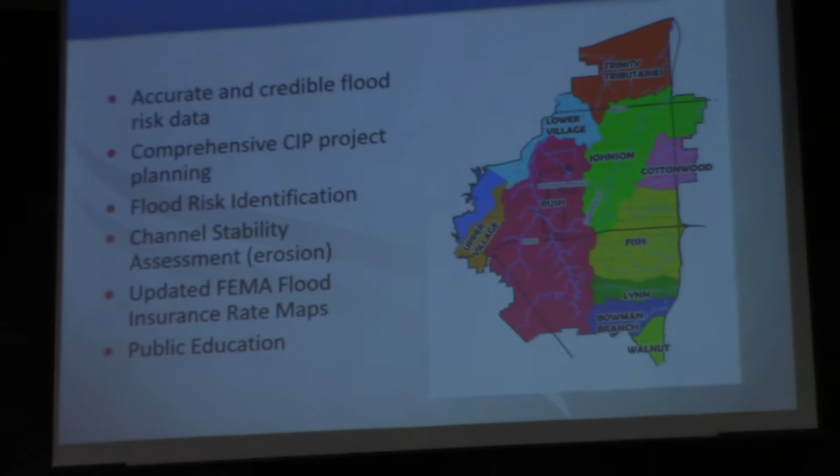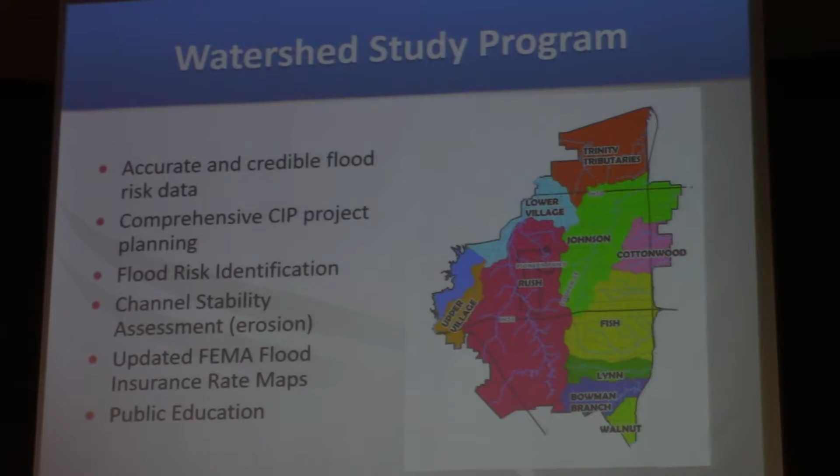So since 2010, when Tropical Storm Hermine hit the Rush Creek watershed and flooded out quite a lot, we've undergone the watershed study program. The whole goal was to update our floodplain information and identify ways to mitigate flooding and erosion issues. That was really driven by the fact that when Hermine hit, we realized that we didn't know where all of our flood risks were.

And so that's the purpose of the watershed study program, to take a comprehensive look at each watershed throughout the city and identify the flood risk, update it based on what's in the ground today, identify where the erosion issues are occurring, and then update the FEMA floodplain maps.

We're also using this information as a way to educate the public. When we find out an area is at higher risk of flooding, or it has specific stormwater issues related to it, we will do outreach to let them know, hey, buy flood insurance, protect your property, understand what your risks are so that you're appropriately covered when something happens.

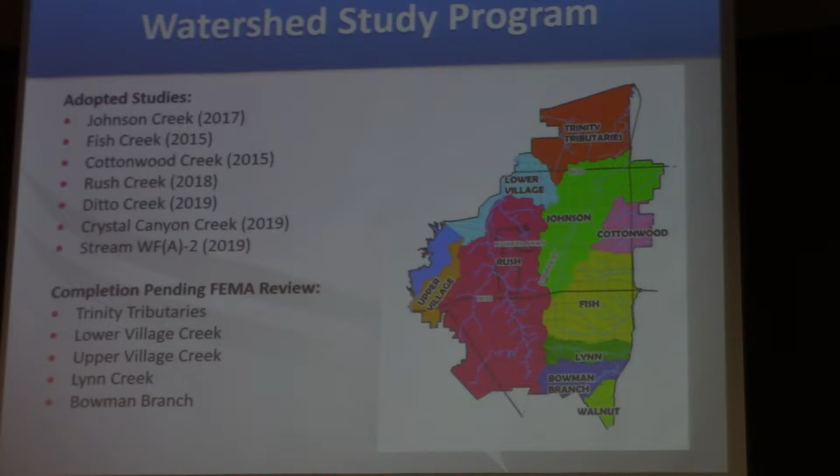So our progress to date is we're getting close to being done with the study portion of the watershed study program. This slide is really just to show you which watersheds we've adopted through council. And I will provide this presentation to him if y'all don't want to take pictures of all the slides, so y'all can actually see this and reference it. So y'all can see that we've adopted quite a lot of the city, and that's the capital plan, as well as where the flood risks are.

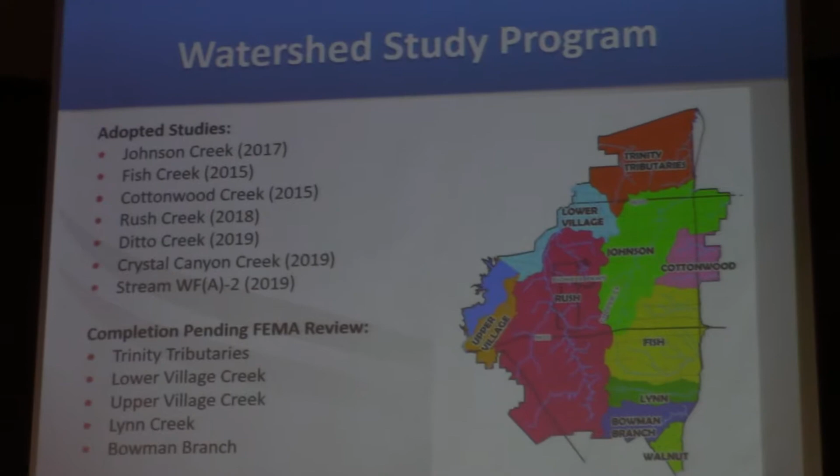And right now, we're finishing up the Trinity Tribs in North Arlington, the Lower Village Creek, Upper Village Creek, which hugs Lake Arlington, and Lynn and Bowman Branch. Those are pending FEMA review right now. We have all the information related to them as the capital program, as well as where the flood and erosion issues are. We're just going through the FEMA process now.

Even though we have FEMA involved in the entire process, we like to see what they say once we get to that final step and make sure it's where they like to see it from a mapping standpoint. And then once we have a good sense that FEMA is okay with it, we'll send it to council to actually adopt the watershed study plan that is being generated. And so this is kind of a general picture of where everything is now.

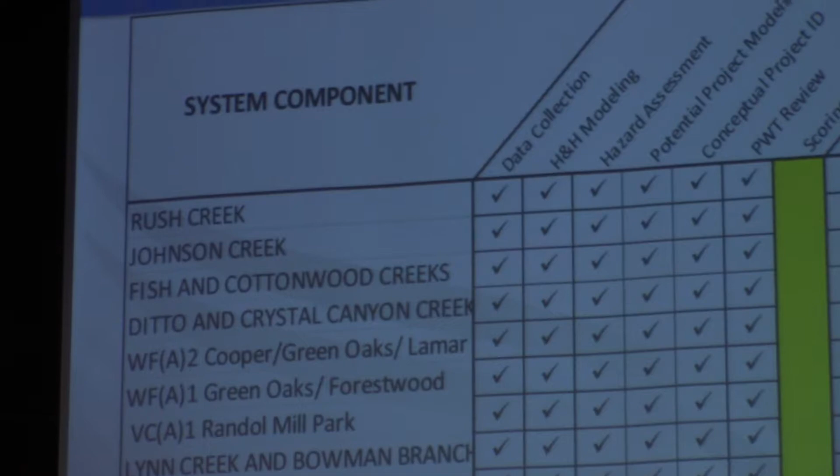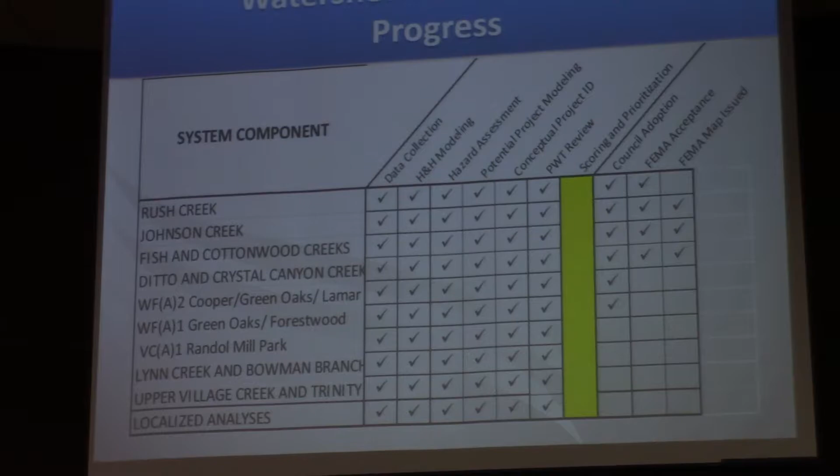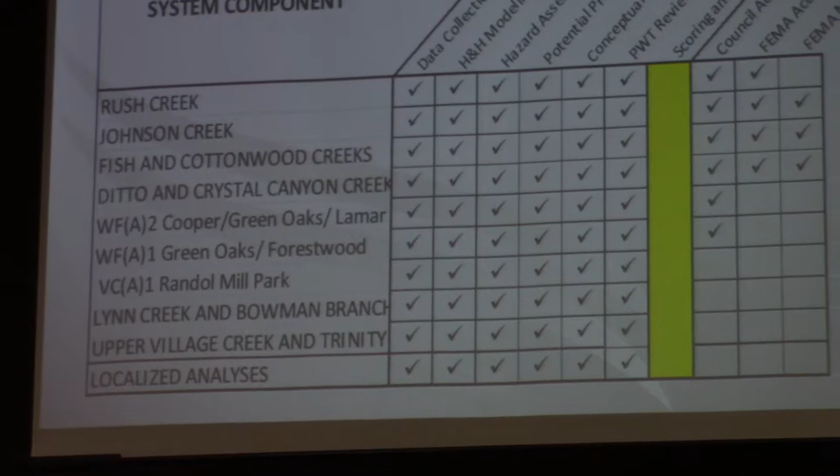We're at the stage right now where we're combining all of the plans into one comprehensive plan, along with a localized drainage analysis initiative that we started back in 2018 after the fall floods. That's basically the areas that are away from the creek. They don't have any identifiable open stormwater infrastructure, but they have storm drains that are potentially undersized. So we've been analyzing 60 areas, and right now we're going through the process of developing a comprehensive plan.

What a comprehensive plan is for the stormwater management program is it takes all of the requirements from a FEMA level, from a U.S. Army Corps of Engineers level, from the TCEQ level, and then starts taking a look at our capital improvement projects that we've been identifying through these initiatives, where our maintenance needs are, what kind of stormwater compliance initiatives we need, so water quality, stormwater quality, and then public education initiatives through the floodplain program: is there a better way that we can outreach to residents? We're going to take all of this information and put it together in one document.

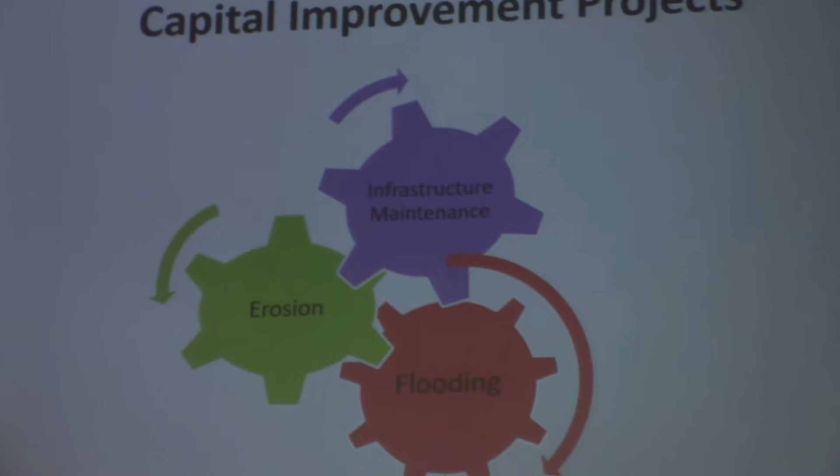And just to give you a guideline, for the capital improvement projects, the capital plan for the stormwater program, we're going to be looking at 3 primary areas, which are infrastructure maintenance, erosion, and flooding. And all of these will be brought together to do data-driven prioritization.

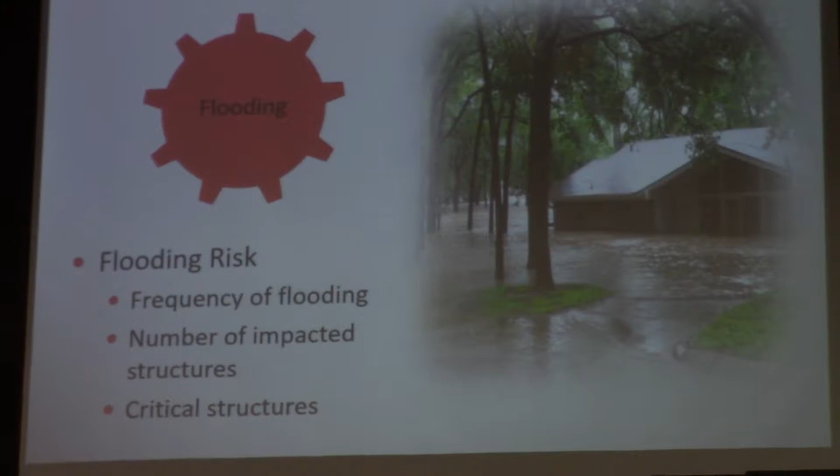So when we look at flooding, we're going to be looking at mainly flood risk. How frequently do people flood? What are the number of structures that are impacted? The critical infrastructure such as schools, hospitals, electrical, things that if they are disrupted, there's a pretty significant potential for either loss of life or a public health issue. It's hard to evacuate a school. So if there is a school at risk, we want to put a priority on fixing the flooding issues around there. Same thing with nursing homes and hospitals.

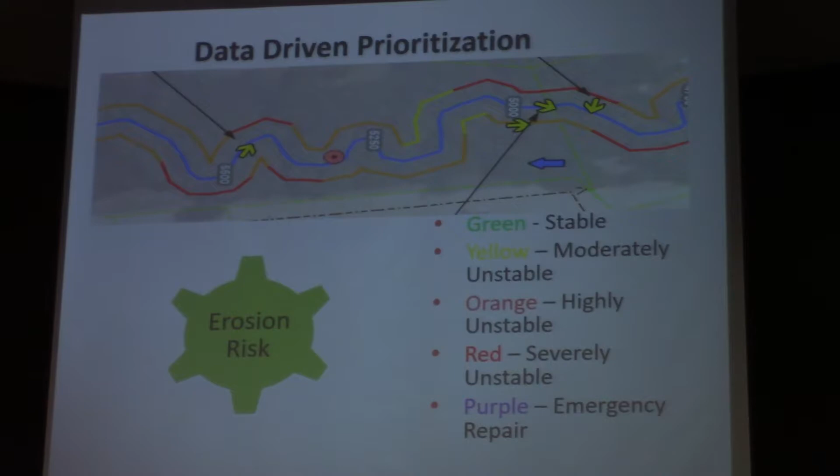From an erosion risk standpoint, we actually went through and walked each stream and identified where banks are severely unstable, or if they are stable, or if they are purple as in they need emergency repair. So we'll be going through and taking a look and seeing, okay, if a bank is at severe risk of failure and there's an opportunity to mitigate flooding, then we're going to look at projects that combine those

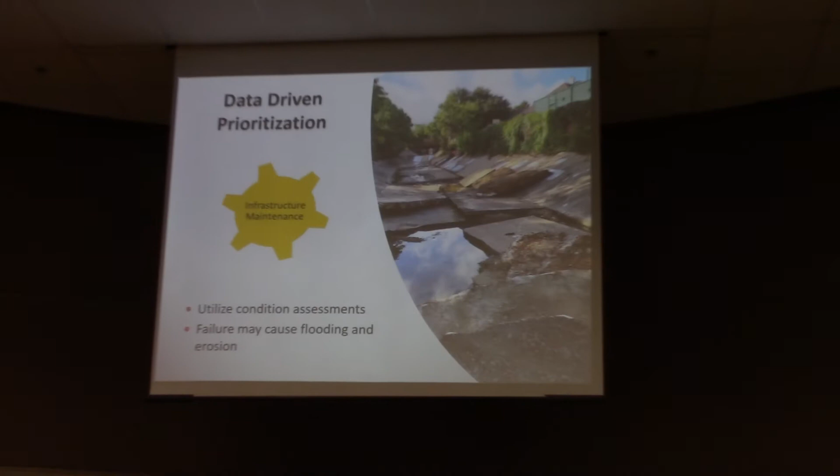flooding and erosion initiatives. And then from an infrastructure maintenance standpoint, you can see here that we've got a concrete lined channel that's just collapsed. It's no longer in working condition. And so we'll be taking a look at basically all of our storm drains, flumes, inlets, concrete lined channels, what their condition is. Like he talked about the red streets, we'll be doing the same thing with our stormwater infrastructure.

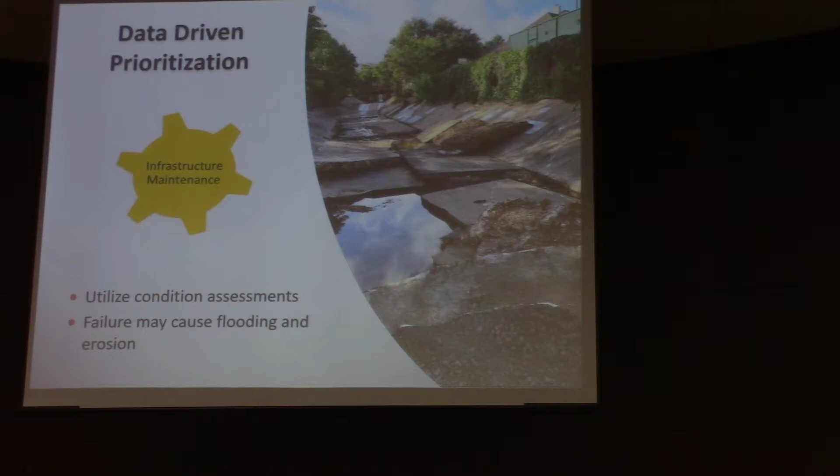So we have a sense of bringing in flooding, erosion, and infrastructure maintenance. We'll do the worst first is the best way to look at that. We'll also be considering regulatory risk of non-compliance. So if this is something where we're going to be non-compliant with FEMA or the Corps, we're going to focus on those, as well as if there's cost efficiency. So if Keith's group is doing a streets project and there's an opportunity to mitigate flooding in the area, we'll partner with them and make sure that the city gets the best bang for their buck when we actually

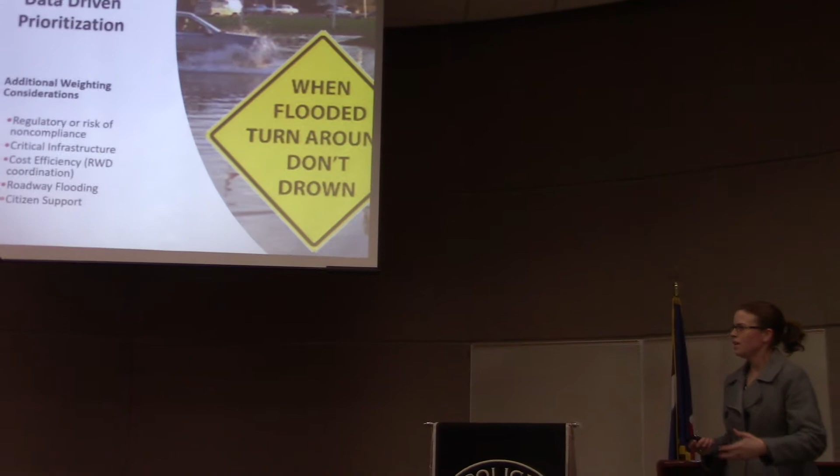do a project. We'll also be putting an emphasis on roadway flooding. So if we have an area that's highly traveled, we want to make sure that when people are driving on those roads and it's flooding, if they make the decision to drive into water, which they shouldn't, there's a lower risk of them being swept off the road.

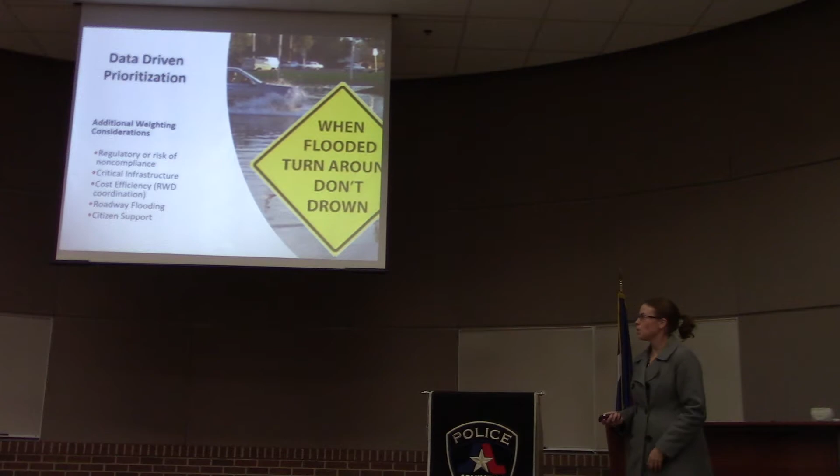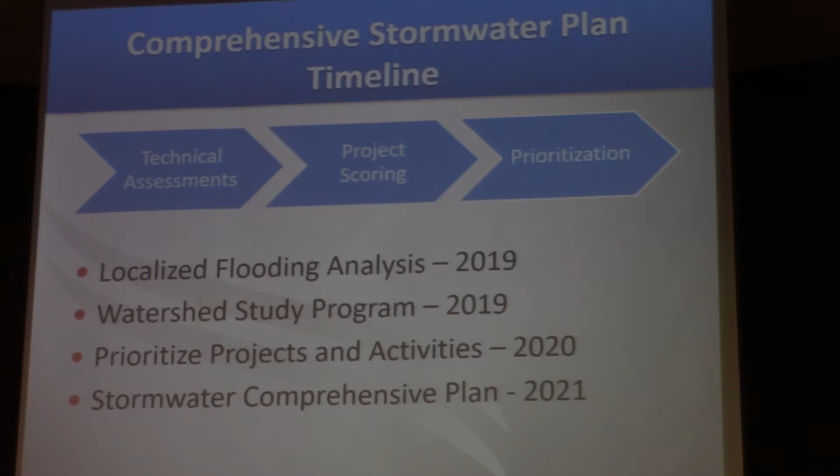So from a timeline standpoint, for the localized flooding analysis, which is those 60 areas away from the floodplain, we have done all the analysis portion of that. We finished the analysis portion of the watershed study. And this year we're focusing on prioritizing all of these projects and activities so we can actually start having a game plan and then identifying funding potential. So if we have grant opportunities or other ways that we need to fund it, we'll be identifying it through the plan. And then the goal is to have the plan for council adoption in 2021.

In terms of projects in West Arlington, we have the Country Club Drainage Improvements and Bridge Maintenance Project that is currently underway. You may have passed it along Park Road, but we are repairing a concrete bridge girder and also doing channel improvements to protect some sanitary sewer lines and mitigate flooding within the neighborhood. That construction started back in September, and right now we're scheduled to finish around May 2020, weather permitting.

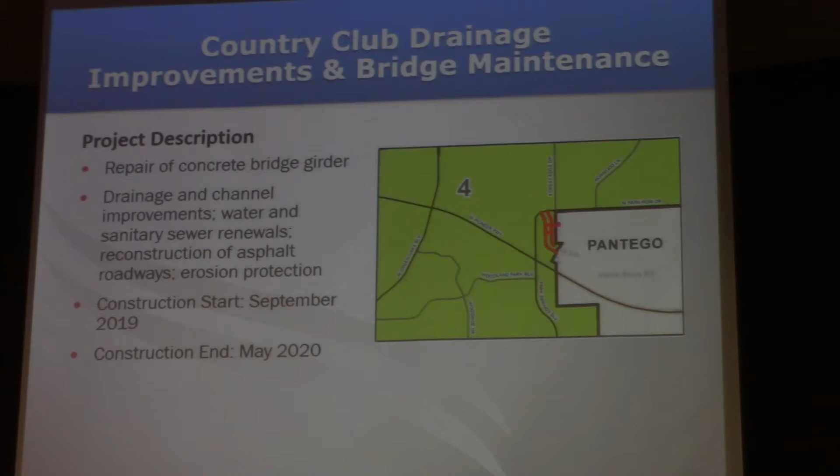We also have the Matthews Court Drainage Improvements Phases 1 and 2, which just bid a few weeks ago, and the construction contract will be on the council agenda on the 28th of this month. These are drainage improvements along Randol Mill Road within the neighborhood generally bounded by Fielder, Sanford, and Oakwood. This is upgrades to the channel to mitigate flooding for about 65 homes in that area. Construction is anticipated to start in April 2020 and finish in December 2021.

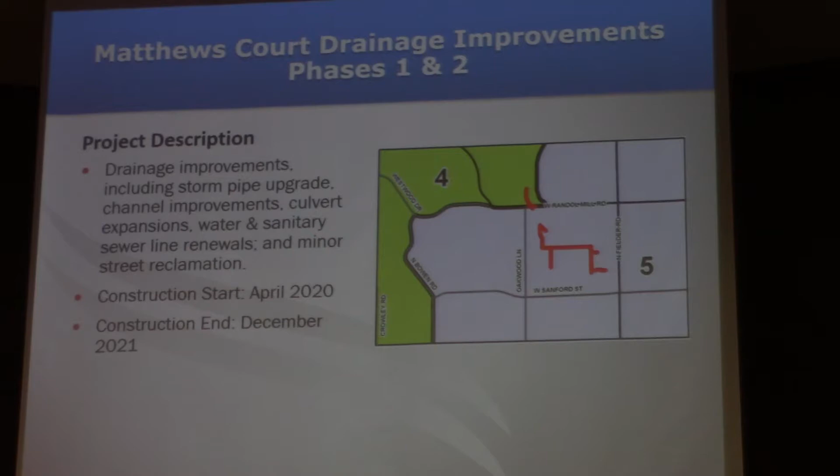We will have a phase 3 of this project, which will be additional storm drain improvements in Fielder Road. Right now we're finalizing the design on that and expect to bid that next year as well. And so that's going to be the full neighborhood improvement. This is actually one of the areas identified in the watershed study that needed significant improvement.

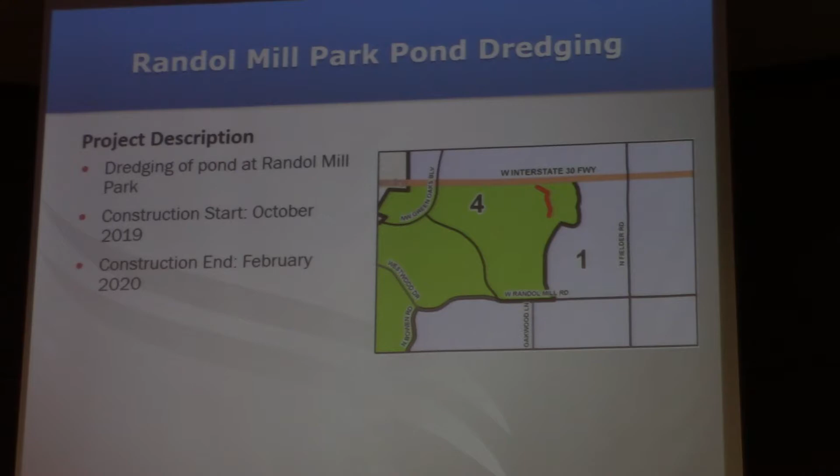And then currently, Randol Mill Park Pond is being dredged. That started back in October 2019. This is just maintenance. There's going to be no improvements to the pond. It's just to remove the muck that's accumulated in it. And we're expecting that one to be done next month. Right now it's looking like it will stay on that track, weather permitting.

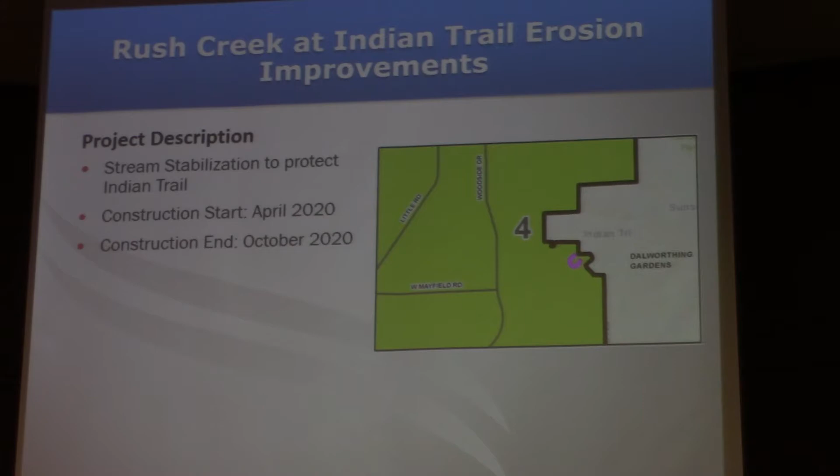And then Rush Creek at Indian Trail erosion improvements. This one's actually still under design. This is where Indian Trail crosses Rush Creek, in a rural area next to Dalworthing Gardens. This is a stream stabilization project to protect Indian Trail. Bidding will probably be closer to April 2020. We just got Corps approval for this. We've been hung up in the Corps review process. So we're expecting bidding in 2020, and then construction should be relatively done early next year.

So with that, I know that was pretty quick. Are there any questions?

If somebody is coming into the area, can they go online and look up these areas that may be potential flood hazards? Yes. And how would they do that? The Arlington Maps Online has the actual floodplain information on it. Now the thing is the localized drainage areas, those are the ones that aren't featured on it. So they can see the floodplain information on the city's website and on the Arlington Maps.

But if they have specific questions on whether or not their neighborhood floods, they can actually call Public Works, and we can walk them through what kind of flood risks there are in their neighborhood. Okay, and what is the Arlington one? Arlington Maps. It's on the city's website. Okay.

So we've had some changes in weather patterns that have sort of changed how we're looking at this thing. How does Arlington compare to neighboring cities that are all in this Trinity drainage system? Are we in the same spot? Are we behind? In other words, how have other cities been addressing some of these same issues, and where do we stand?

Well, comparing ourselves to other cities, I feel like, and this may be my bias, we're ahead on some level because we are embarking on a comprehensive approach to actually prioritizing all of our flood risk. The benefit that we've got is that we've been able to go through and study all of our watersheds and then bring in the localized analysis on it.